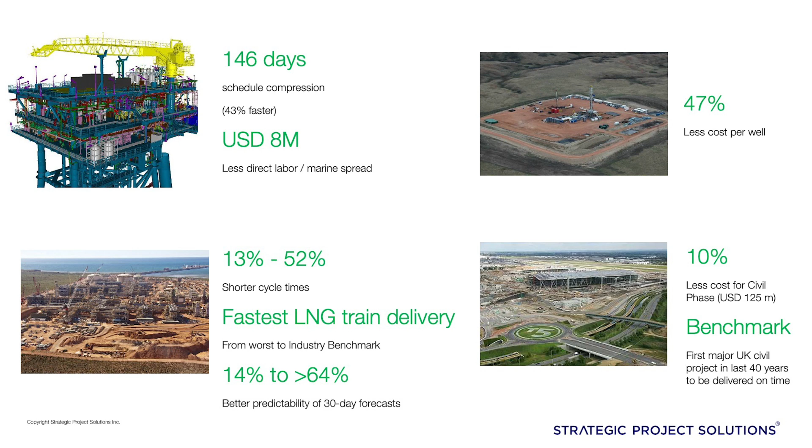Companies that are actually able to compress schedule by a significant amount of time, 43% faster, 47% less cost in oil field development. LNG facilities in oil and gas have been able to reduce cycle times by 52%, becoming a benchmark, becoming much more predictable, significantly much more predictable, as well as a significant reduction in cost. And these are just 4 examples of projects achieving quite significant results.

The question is, what is the thinking behind what they do? I'm not going to talk about exactly what they do, but what is the thinking behind what they do? How are they looking at the challenge?

The first and most important idea, and we could probably spend one day on this slide alone, is that schedules are not representations of production systems. This is a very, very important idea. It might not be a new idea to you, but we need to talk about it. Our belief that schedules represent production systems is flawed. We're going to expand on that.

From a production perspective, once again, Gary mentioned this, schedules are a very important tool because they tell us what is the demand that the production system should respond to. Let me give you a simple example.

If I have 10,000 piles that I need to drive, and I have 10 months to do it, that means I need to do 1,000 per month. Let's say 20 days every month, I need to do about 50 every day. My production system should be able to generate 50, should be able to produce 50 every day.

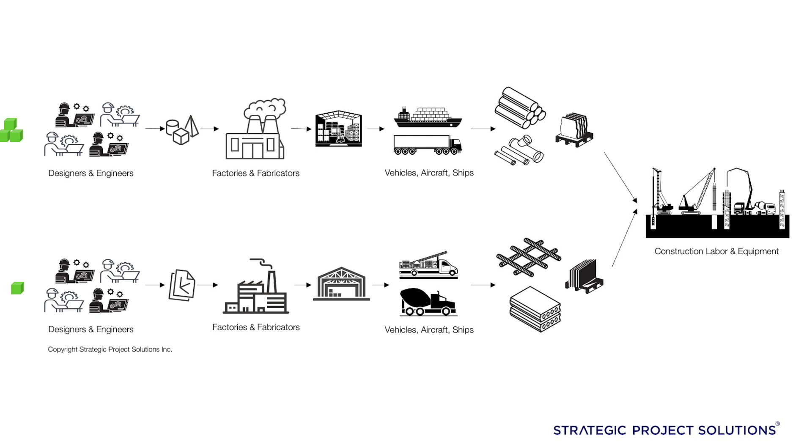So from a production perspective, the idea of a production system is that things will move through that production system. And as they move through it, there is a cycle time, the time it takes to traverse. Piles, drawings, packages of work, deliverables in engineering. Even if you isolate just the engineering box, there is an engineering production system. Do we produce in engineering?

Right? Yes, we do. We produce deliverables, we produce designs. So when we hear about production, it's not just about physical production, in case we're thinking that way. We have knowledge work, we have craft work, and we can see the entire system as a production, the entire process as a production system.

So one way, the thinking behind what these organizations are applying is the idea of focusing on 4 verbs, 5 levers, and 3 curves. This is the definition of project production management that I'm going to take you through very briefly.

When we say 4 verbs, the idea is that because production is about transforming things—I transform engineering into something physical, then move to the site—we need to focus on the core production activities: how we design, how we make things, how we transport, how we build and commission things. If we don't touch these core production activities, we need to stop and think, what are we doing? If we don't influence the performance of these 4 production activities, we need to think about what exactly are we doing.

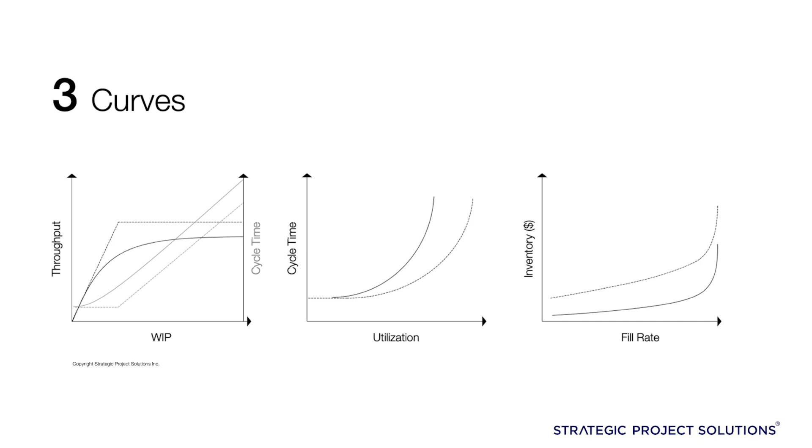The more we put in that system, what this is telling us is that our cycle time, now looking at the chart to the right, is going to go up very rapidly. So if we're trying to be more predictable, if we're trying to compress our schedules, one of the things we need to keep in mind is our ability to reduce the work in process in any production system, physical or non-physical. And by the way, that's not my opinion, I'm not giving you my opinion. I'm describing the elements of operation science, and it's going to happen that way on projects.

I'm not going to talk about the other one, just to move forward. But this is what we see every time that we ask people in the industry to draw what is the relationship between cycle time, utilization, and work in process, and we get these sort of noodle soups. We are not in agreement as members of the same team, as companies in the industry.

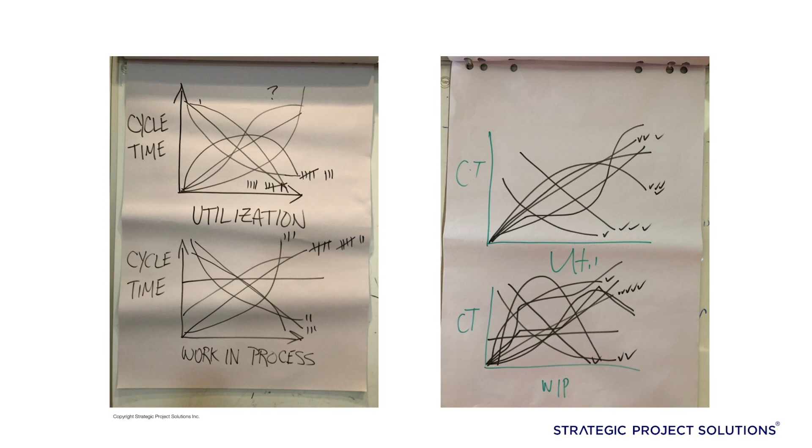If you look at this, cycle time - let me see if I have a laser here, yep. If you look at the one coming down, this team, the individuals that believe this is going to happen, they will increase capacity utilization to move faster. The other half of the team will do exactly the opposite - they understand that if they increase capacity utilization, things will actually take longer, and therefore they will try to maintain some level of capacity utilization. But those are two opposite strategies, and we see these in members of the same teams.

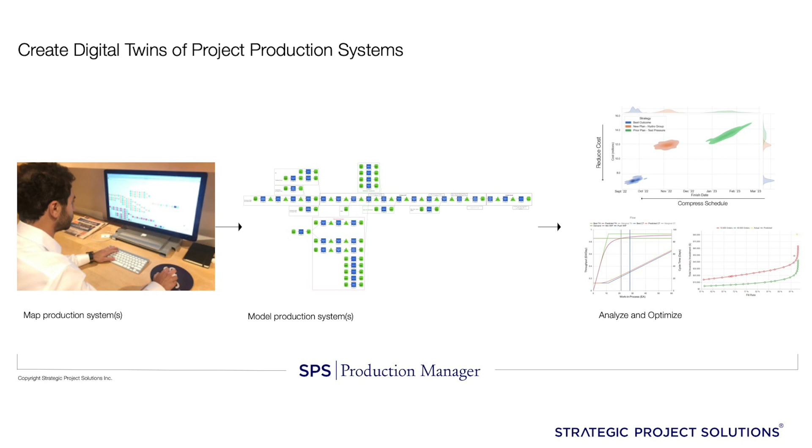Does this make sense? So one of the things that the Project Production Institute is doing, including this symposium, is to start creating much more than just awareness - understanding the impact of these decisions on our ability to perform effectively and get our projects through the process. It's about mapping out the process, and there are tools out there you can use to do so. Once you map the process, there's specific information you have to collect that will tell you how the production process will behave. We need to know the sequence of operations, who does it, what policies are in place to control production. Once you have that data, you can start to generate useful insights for your projects.

So here's an example of an engineering production system. Their goal was to create 1,700 engineering deliverables - in this case isometric drawings - between May of 2020 and October of 2020. At the time, they were considering reducing the amount of people dedicated to this project and putting them on another project, but they were struggling with a lot of rework. So what you can see here is this production process that was mapped.

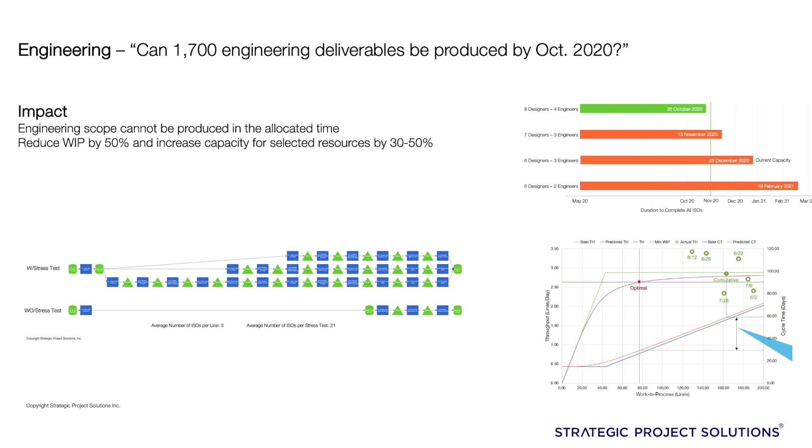These three streams of work are the same sequence of operations, but one with partial rework, one with a more complete rework of the ISOs. They were having difficulty computing how much of their capacity was eaten away because of the rework, so we created this model to tell them and show them exactly what's going to happen if they keep on track with their current plan.

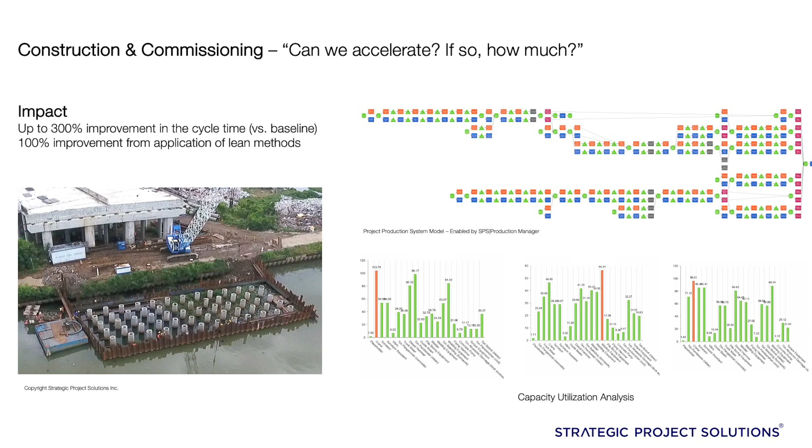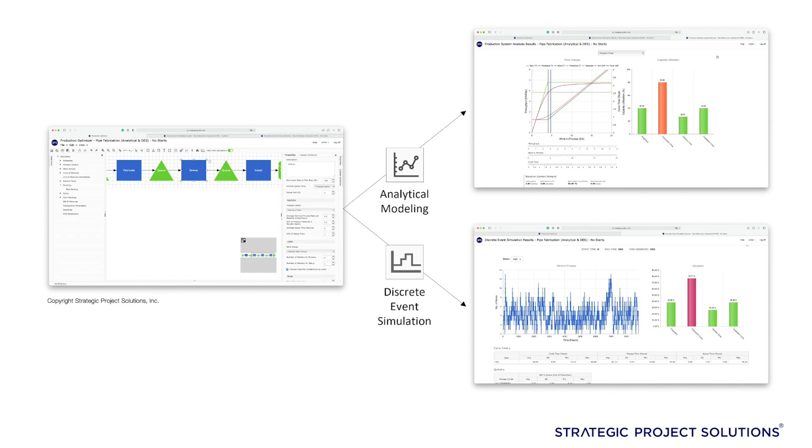I'm going to open this box in a bit, but when we're modeling production systems, we have two ways of analyzing how the production system performs: analytical modeling and discrete event simulation. We're going to go over a couple of examples of each in a moment. At a high level, analytical modeling allows us to find optimal policies, to design the production system so that if those policies are in place, you get the results you want. Discrete event simulation allows us to track how the production system behaves over time. We can see whether specific deadlines are met, and the accumulation of work in process in various parts of the project, so you can plan for the space required, things like that.

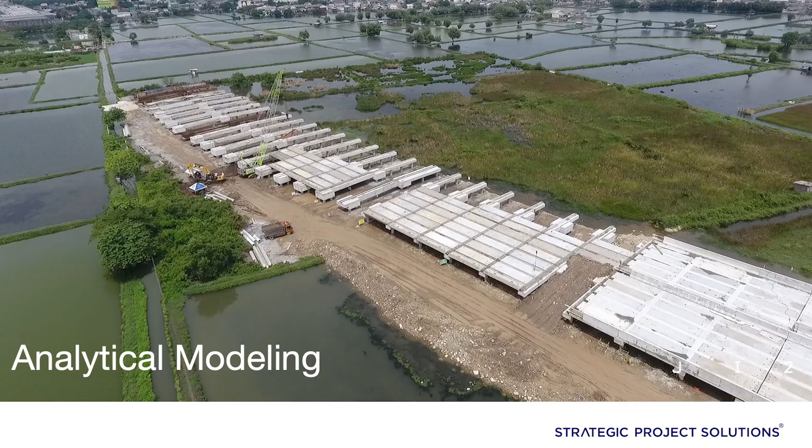This first project was a 14-kilometer toll road, and we decided to use analytical modeling because the process was quite simple. Essentially what we're doing is driving precast piles, sheet piles, pier and beam, and columns and slabs. It's a very simple process here at the top.

What this model allowed us to uncover was, in each chunk of this process, what's the bottleneck? Because that's really what's driving the rate at which you can go, how fast you can go. And in each chunk, is there opportunity to change some policies to go faster, and how much work in process should we have built up? What you can see from this previous picture is they have a ton of work that started, but not all work that's finished.

What the team reported after implementing some of the strategies we gave them was a 300% improvement in cycle time. This was actually twice as fast as the classical applications they would teach around. So it's a huge gain.

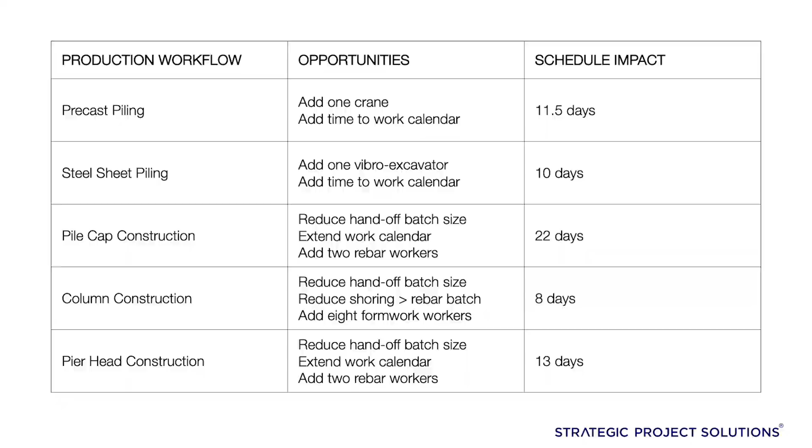The way we did this was we created a model for each individual workflow in the process - precast piling, sheet piling, pile cap construction, column construction, pier head construction. In each of these different workflows, we identified potential opportunities to get schedule savings. In most of these it was around adjusting bottlenecks. In these bottom three - pile cap construction, column construction, pier construction - there was significant handover size between each team, and what that was effectively doing was increasing the batch size and pushing up their cycle times.

Now for each of these bottlenecks, each contributed a potential delay to the schedule here. So if they didn't address the bottlenecks, this is what they would expect for an additional delay in the project - about 100 days.

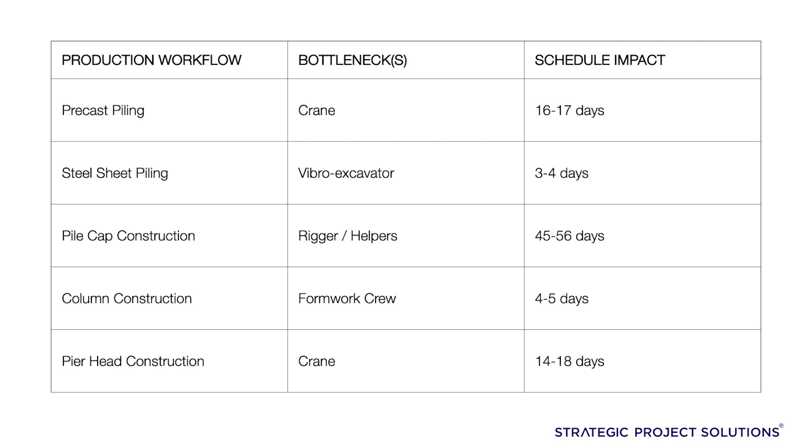For each workflow, one of the critical elements to understand bottlenecks was to map out the capacity utilization of each resource. The team knew they had to add people, but they weren't sure which people and which equipment to add to increase capacity. It's important to know this because if you want to go faster, you need to know where you increase capacity.

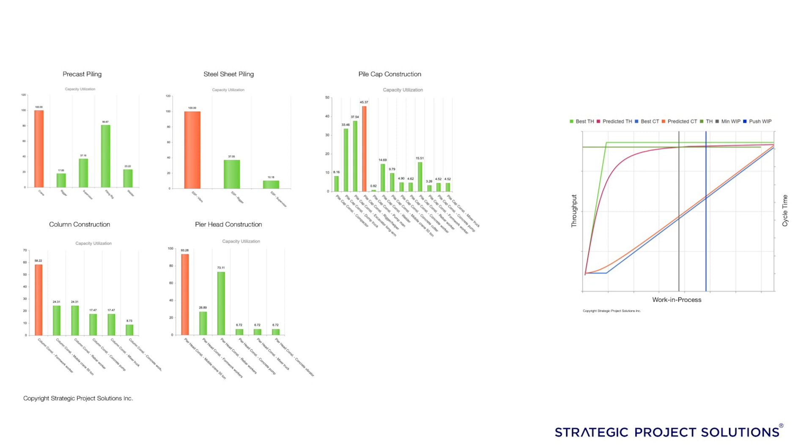The bottleneck is what drives the speed at which your project can reach throughput. So if you're adding resources, you don't want to add people where utilization is low - those guys are standing around all the time, and they start to fall off. But one change in a parameter is going to change this profile completely. So it's important to understand when you bring people on and when you take people off - when is the best time to do that? When should you be manning up, and when should you be taking off? We can help them identify the best time to bring on additional capacity.

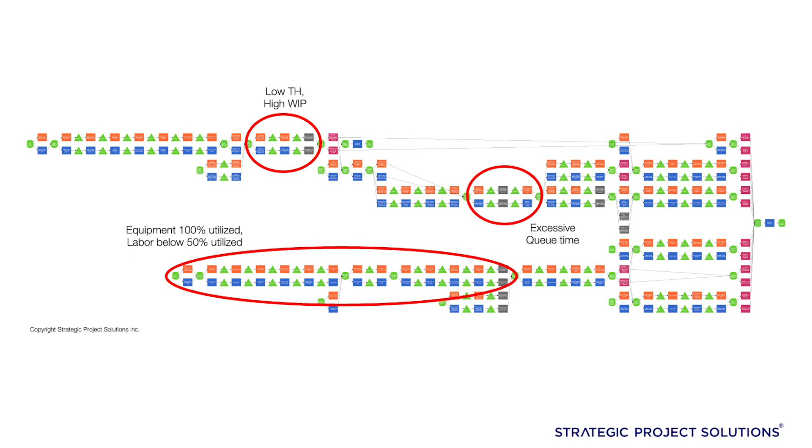If you go back to the previous one, I just want to highlight something important. You might have noticed that these production system models have these little boxes and triangles. You might be wondering, what are those triangles? The boxes are where the work is actually transformed, and the triangles are when the work waits, meaning nothing is being done to it.

There's a time component in these triangles, and if you start adding up all that time across the production system, we can measure by modeling - we can actually quantify, not guess, what happened with the total cycle time. And what we're learning as we do this all over the world is that the opportunity to compress the cycle time is not so much on the operations themselves.

It's avoiding that the work waits for available capacity - the time is in these triangles. So we need to shift our thinking from productivity to the productivity of the system, which we call throughput. They are not the same.

Remember, we're not doing a P50, P90 schedule analysis or anything like that. We're not analyzing the right side of that schematic - we're analyzing the left side. Okay, so there was a question.

Not all work is spread evenly as it goes through the system. So if you have a piece of work that sits behind in the time queue, is there a way to relatively show the damage of work sitting here versus work sitting later in the system? Because depending on where you're at in the project, it's not all created equal in terms of impact.

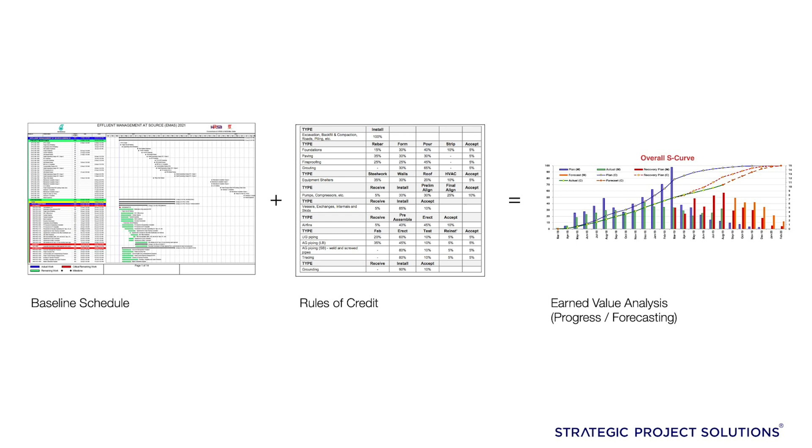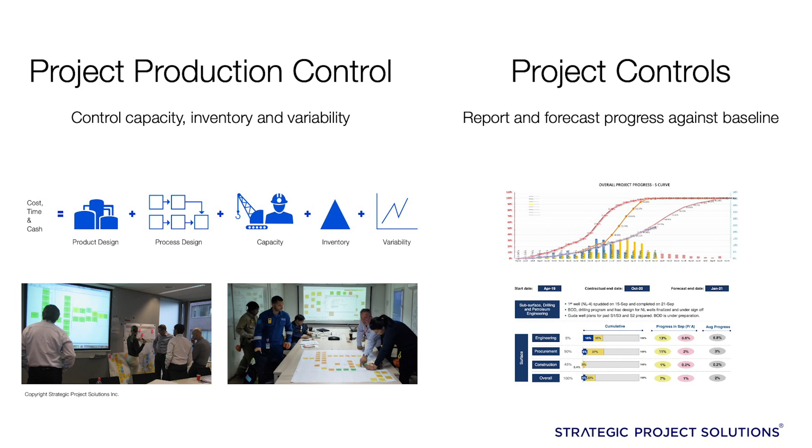This engine doesn't replace current scheduling efforts, but augments them because it's a production control engine with four main components. The first is relentlessly focusing on standardizing production processes. Why do we care about standardization? Because we can compress cycle times—not just standardizing the product, but also standardizing the process.

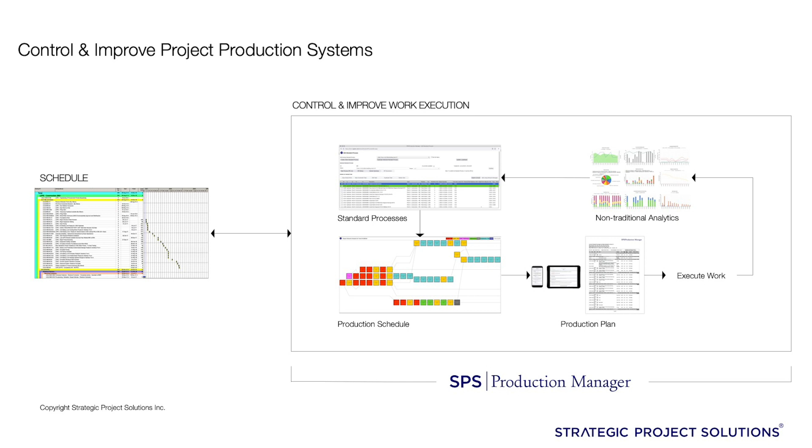The second component is combining those standard processes to create an integrated production schedule, which might look very colorful because we're keen to understand how work is flowing and how it changes flows. We know that at interfaces, there's a high likelihood work will wait—we'll have queues—and if a lot of work is waiting, cycle times get extended. This is also about understanding the true complexity of the production schedule.

Then we do a lot of work on production planning—making decisions about how we allocate the limited resources the teams have on the work—and get a set of non-traditional analytics. This isn't about EV, CPI, or SPI. It's a different type of analytics that augments their perspective, almost like giving teams a different set of goggles to see new opportunities to improve their work.

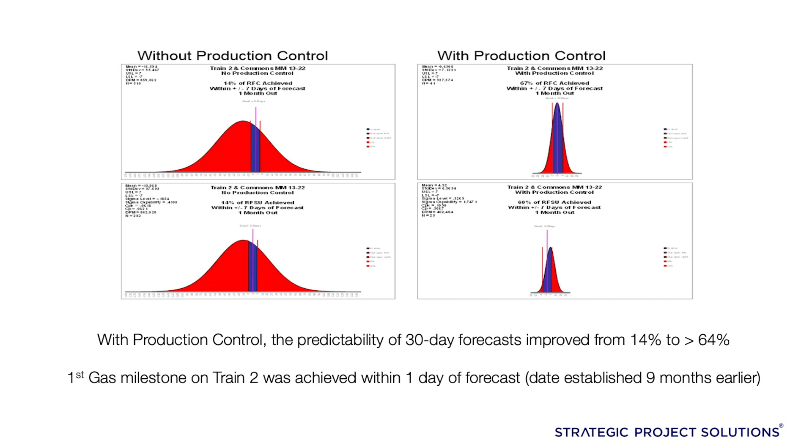And so we finish with this. What we're saying is, if we follow conventional thinking, the likelihood that our present results repeat is extremely high, as you saw in those statistics. We need to do something radically different to look at this. The idea we bring to you today is to focus on the production system, because if the production system doesn't have the capacity to deliver what we want, we are not going to make it. More scheduling is not going to help us. More detailed scheduling is not going to help us. Any questions?

No, I agree with you, we can do that. When we say build, implicitly we include commissioning, but you're making a good point. In commissioning, the production system produces systems and subsystems ready to be operated. Typically in industrial facilities, or even other ones, we see the transition from construction to commissioning—the transition from working based on areas to working based on systems. And what commissioning needs is a sequence of specific systems in a specific order, which is not necessarily what construction releases to them. So the commissioning teams spend a lot of time defining the optimal sequence of commissioning, but what construction gives them is a different kind of work, and things get completely sideways.